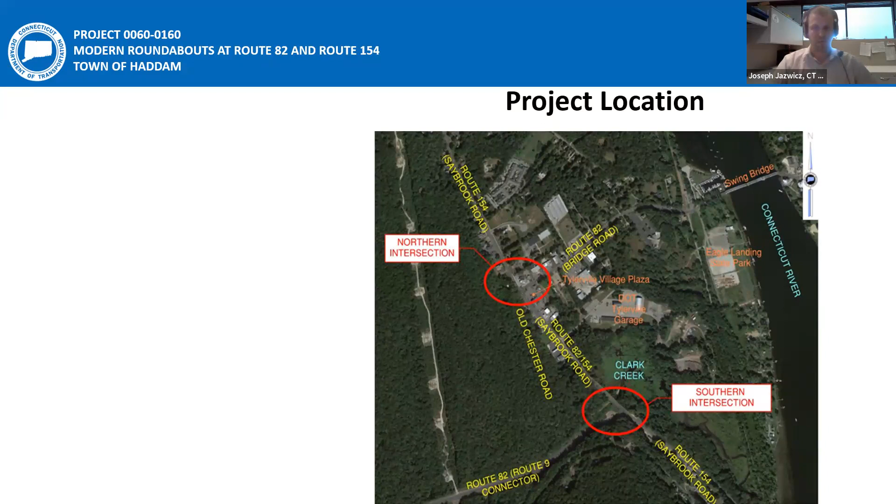This project is located in the town of Haddam, primarily covering two intersections. The first is the northern intersection, where Route 82, Bridge Road, intersects Route 154, Saybrook Road, also near Old Chester Road. It's currently a signalized tee intersection, as well as the southern intersection where Route 154, Saybrook Road meets the Route 82, Route 9 connector.

For those who attended our stakeholder outreach meeting back in May 2021, and our virtual public informational meeting conducted in June 2021, our project purpose might look familiar to you.

We want to increase safety in this corridor by reducing vehicle speeds and the number of vehicle conflict points at the intersections, as well as increase sidewalk connections within the corridor. There are existing sidewalks constructed under other state projects and recent developments, so we want to close those gaps. We also want to improve traffic operations by reducing vehicle queues and delays, and Bridge 622, which we'll discuss in the proposed improvements, needs to be replaced due to its structural condition.

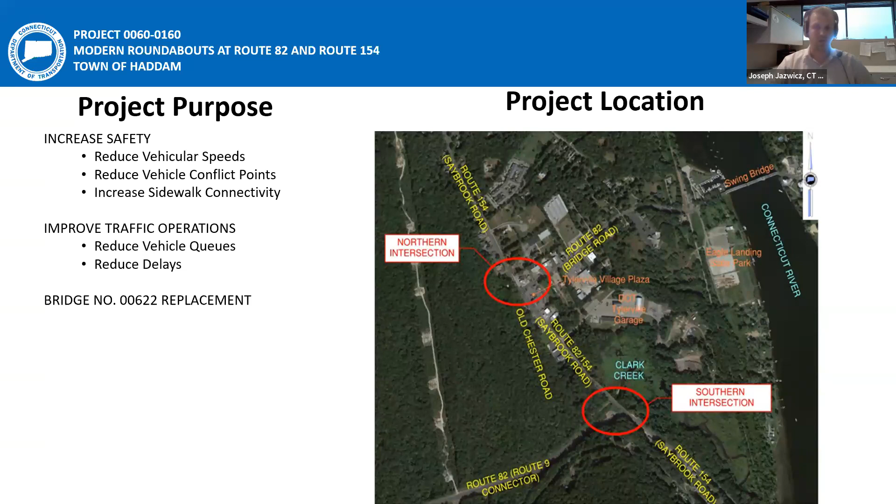A little review of the existing assets: Bridge 622 carries Route 82/154 over Clark Creek. It was constructed back in 1930. Based on the latest bridge inspection report from 2021, with a new report coming out in the coming months, it was rated structurally deficient.

The superstructure and deck both received a rating of 4 out of 9, which is poor condition, as well as the existing signal at Saybrook Road and Bridge Road. It was installed in 1994, currently 29 years old, well beyond its service life, so it needs attention and replacement.

The pavement out there was last resurfaced in 2012-2013 as part of the maintenance VIP program, as well as the sidewalks I talked about earlier. There are many connections and gaps that are omitted, where sidewalks lead to nowhere.

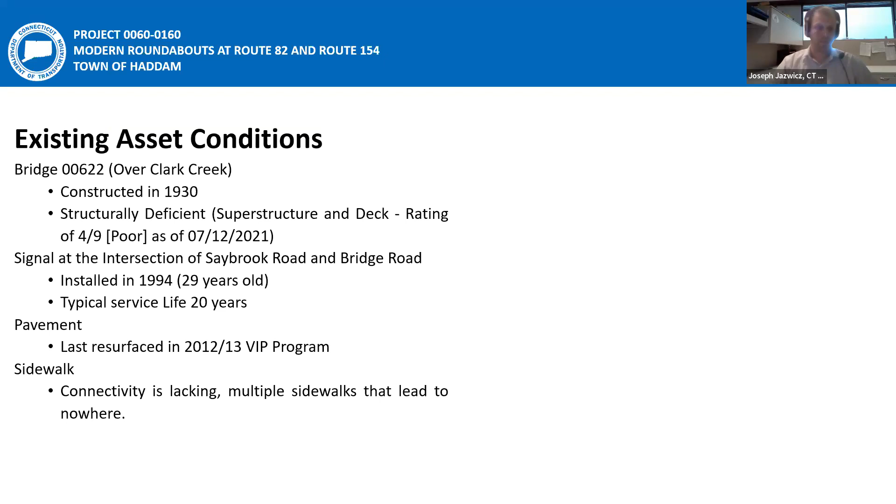Currently, based on our latest public outreach and stakeholder meeting, we've finalized our design. Just this past week we delivered final contract documents to our internal DOT processing unit to get those ready to be advertised. Permit applications were submitted to regulatory agencies back in May, and we're anticipating approval within the coming months, as well as our rights-of-way office is in the final acquisition phases of property that has to be acquired as a result of this project, which should be completed by the end of August.

As for funding, we're currently in 2023 with a partnership with Federal Highway at 80% and 20% state. So there are obviously federal shares at stake in order for this job to proceed forward.

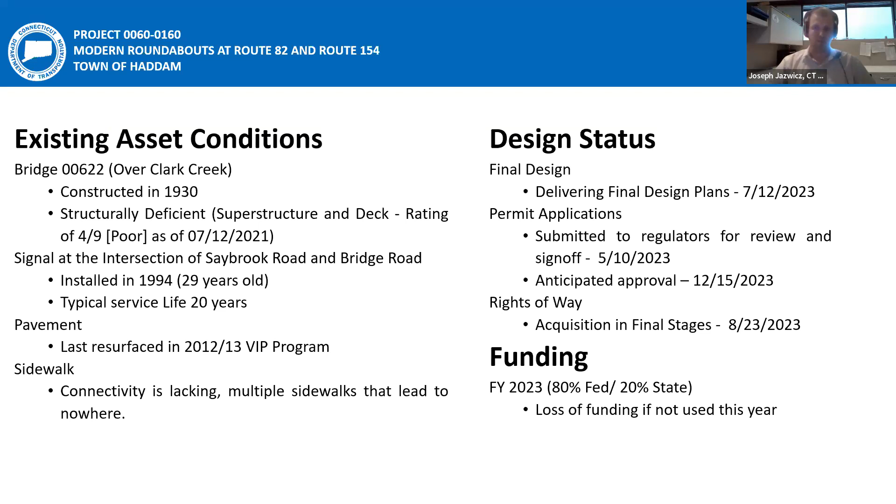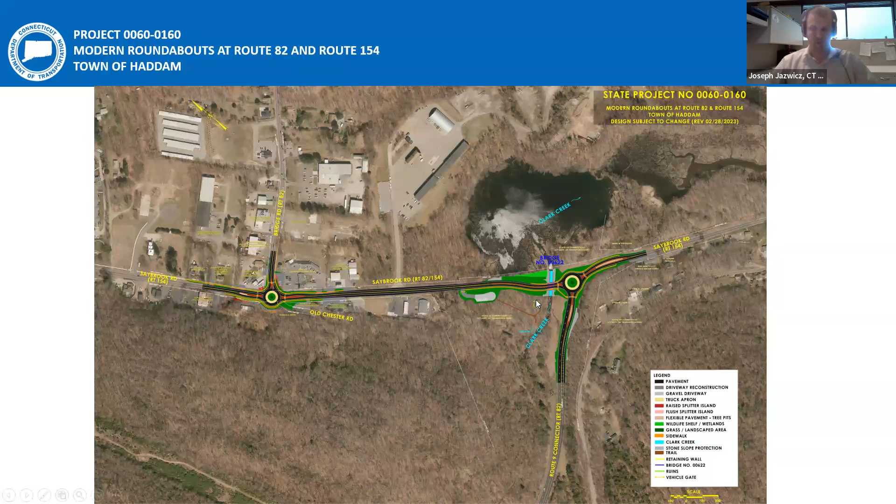I wanted to review the color plan in a bit more detail for those who have not seen this or had the opportunity. This is the overall project color plan. Here's Bridge Road, here's the Route 9 connector. I'm going to zoom into each one and we'll talk about each individually.

At Bridge Road and Saybrook Road, we're proposing to replace the existing signalized intersection with a modern roundabout. It will be a single lane roundabout with splitter islands on all approaches. We have a central island with landscape features and plantings. There's been discussion about including a 'Welcome to Tylerville' sign, and this project will require construction of a retaining wall and closure of Old Chester Road.

Also, driveway aprons will be reconstructed, and sidewalks will provide connection to the existing sidewalks located on Bridge Road, as well as the existing sidewalks currently at the apartment complex at the northern limits of our project.

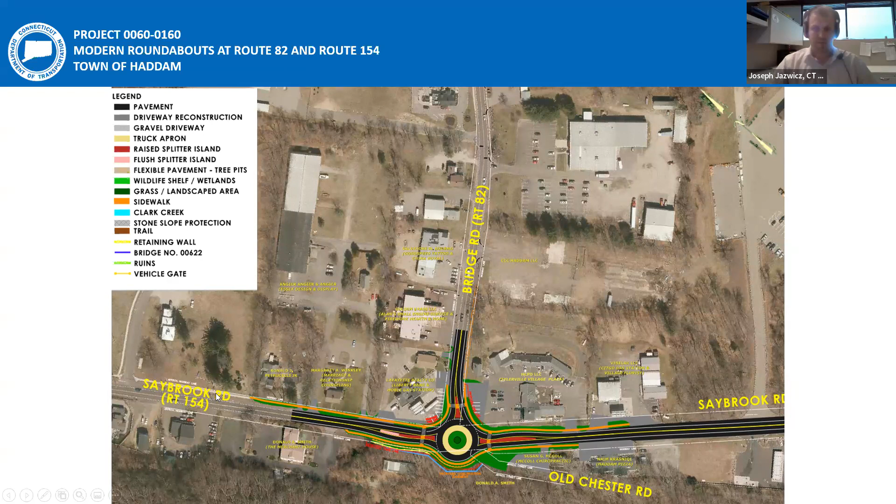Moving to the southern roundabout, the main focus here is constructing a new bridge, 622, upstream of the existing bridge offline. We'll also be providing sidewalk access, splitter islands, landscape treatment in the central island, and truck aprons.

As part of our stakeholder outreach and public informational meeting, the Clark Creek Cascades, we've recognized there's been a draw to the local community. So as part of our outreach, it was suggested to include a parking lot to allow the community to access these cascades and park there, connecting via trail network or the sidewalks. We saw that as an added benefit for the project.

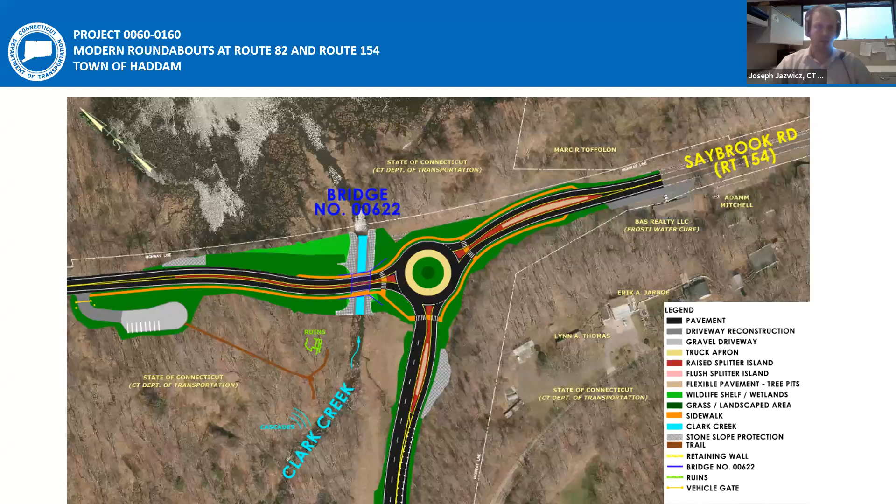In terms of construction coordination, those of you who attended the stakeholder meeting will recognize a lot of this wording, except as the designs progress, we'll have the opportunity to refine it.

Two-way traffic will be maintained during AM and PM peak hours, defined on weekdays from 6 a.m. to 9 a.m. and 3 p.m. to 6 p.m. During weekends, traffic will be maintained at normal operations from 10 a.m. to 6 p.m. Outside of those hours, during off-peak hours, alternating one-way traffic will be utilized, establishing a construction zone with flaggers on either side. No full roadway closures with detours will take place as part of this project.

As much work as possible, when we developed our suggested construction sequence plan and staging, we wanted to do as much work offline as possible, meaning outside the existing roadway. Examples include the proposed bridge and the northern retaining wall. This was for two reasons: to minimize disruption to the traveling public, and to allow the contractor a safer and more productive work zone since he can work offline without maintaining traffic.

Driveway access will be maintained to local businesses and residences during construction. For driveways that are reconstructed, coordination will occur between the contractor and those local businesses and residents, notifying them of when those operations would take place.

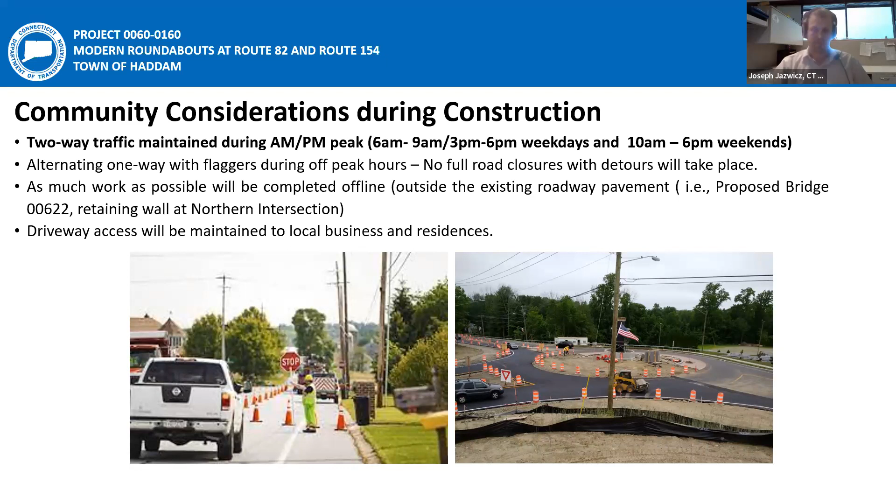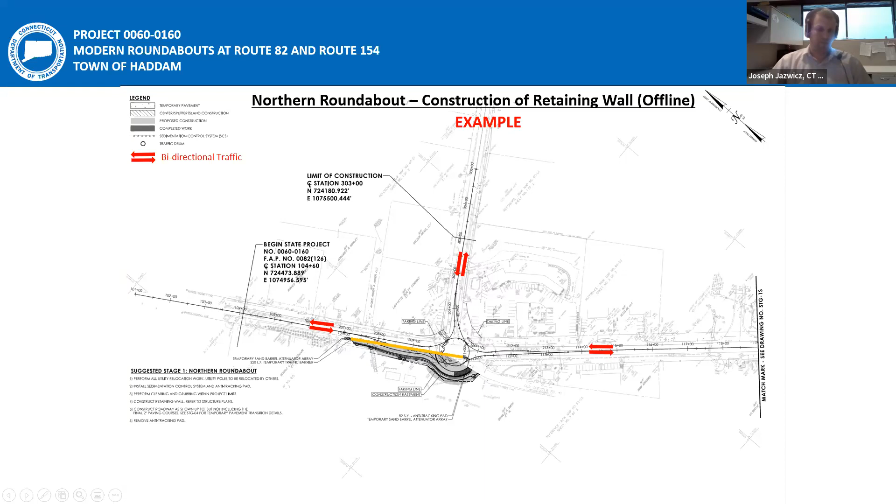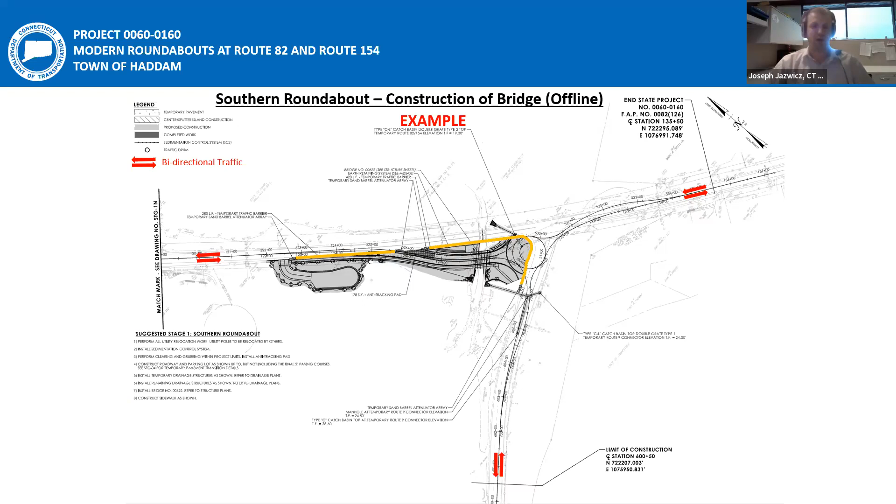Similarly, at the bridge at the southern roundabout, all work is offline upstream of the existing bridge. Traffic would be maintained in the existing roadway footprint while the bridge is being constructed. These two aspects of the job have long durations, so it's a benefit that we're able to perform as much of this work offline while minimizing disruptions.

Here's an example of alternating one-way traffic. The work zone would be established, and on either side there would be flaggers directing traffic. Per our contract provisions, that work zone can only be a maximum of 300 feet in length, and 700 feet in length when only paving operations are occurring, and again those are during off-peak hours.

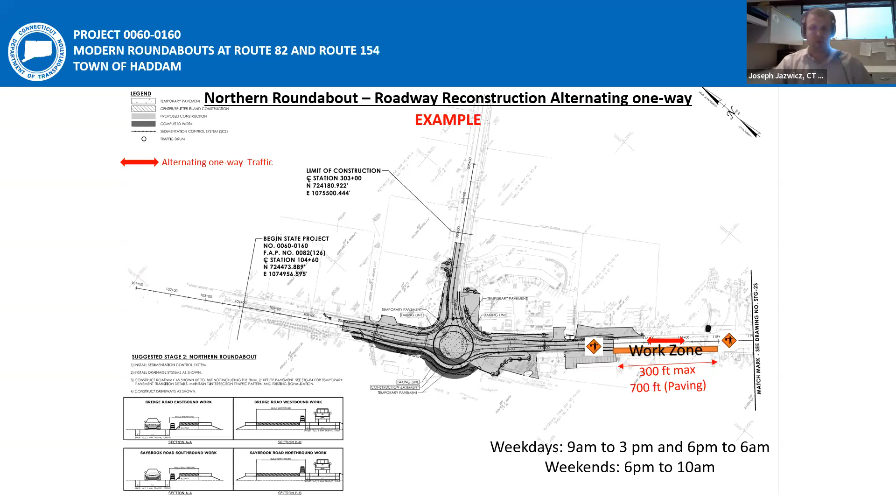Same situation at the southern roundabout when we're rebuilding up this approach.

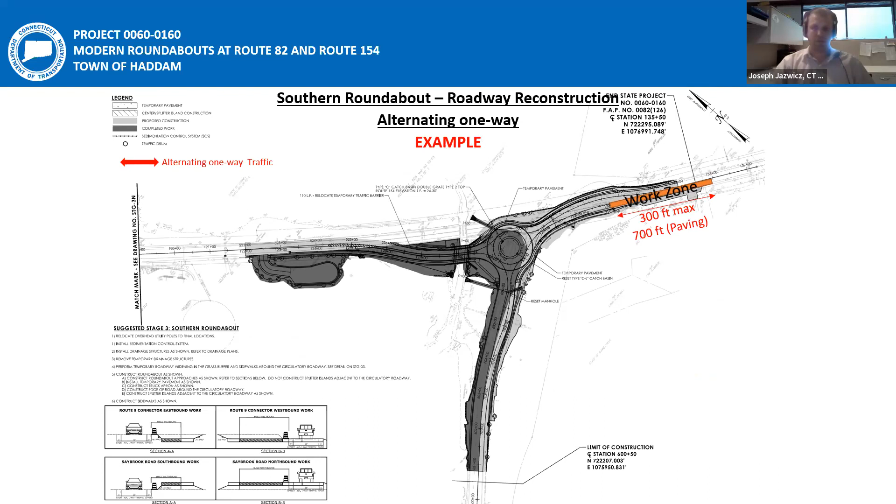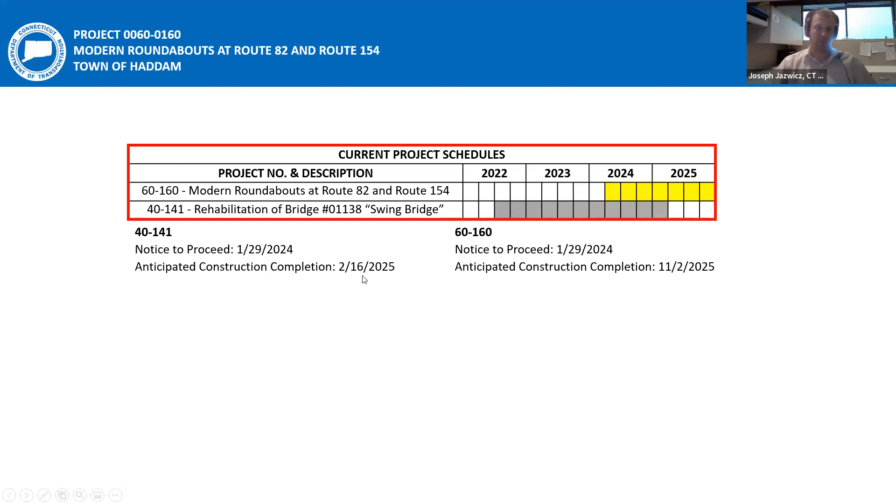As Bob mentioned earlier, we're going to lay out two options regarding construction staging that the department has explored. Currently, this is what we have in our contract for construction activities. Before I walk through it, I wanted to cover why this was the preferred option. The order of activities was selected as the preferred option because it allowed for the most separation between when we're working on various intersections in relation to the swing bridge project, as well as allowing the contractor to disrupt only one intersection at a time while the other maintains normal traffic operation.

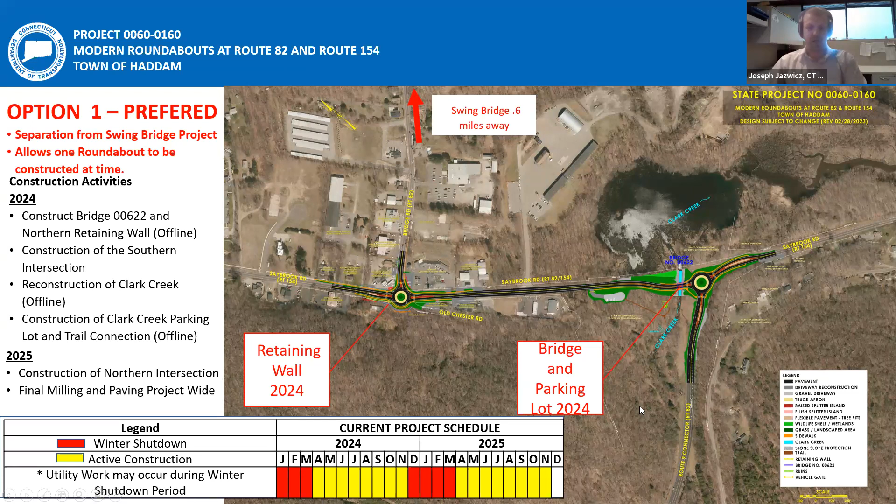So what does that look like? In the 2024 season, the main activities occurring only at the northern roundabout would be construction of the retaining wall, which as previously discussed is all offline work with the existing roadway footprint and traffic maintained, as well as construction of the new bridge and the parking lot. Also in 2024, we'd be constructing the southern roundabout.

The benefit of constructing the southern roundabout first is that due to alternating one-way traffic patterns deployed on the swing bridge, being 0.6 of a mile away, queues could form during some activities. So we want to allow as much of a gap between construction activities as possible, because we don't want overlapping patterns that lead to driver confusion.

Following the 2024-2025 winter shutdown period, the roundabout at the southern intersection would be complete. Then the contractor will move on to the northern roundabout, building up the grades, establishing the circulatory roadway and tying in, and then doing a general mill and fill paving project-wide to connect the two roundabouts together.

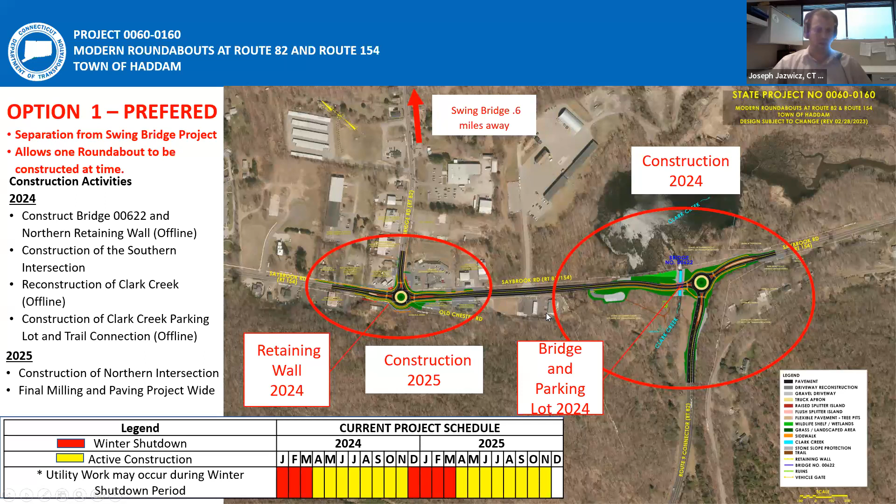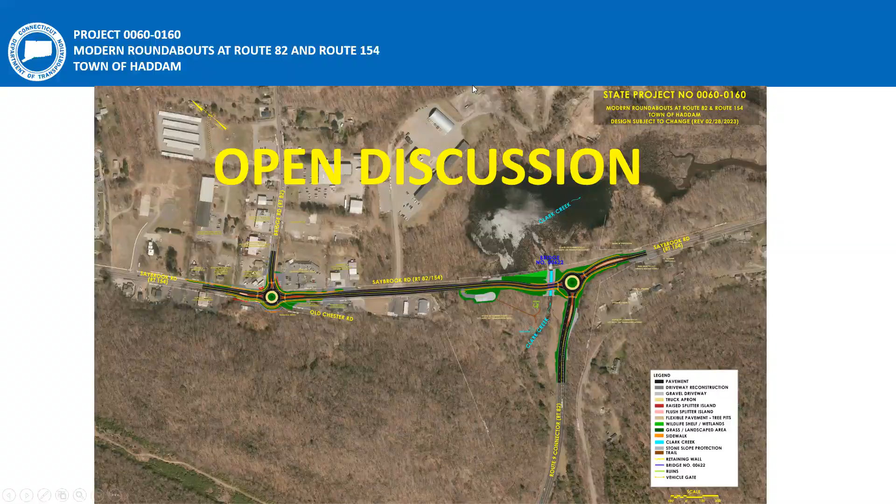I'm not seeing anyone right now. So I see Irene, so we'll recognize Irene. Go ahead, Irene.

Hi everybody, thanks so much. In conversations we've been having about the roundabouts, I wanted to get the plan you shared at the last meeting so I could take a look at it. You guys are probably the best people to answer this question: why is this roundabout only one lane? My thought is that when the bridge is open, traffic stops and builds up. Whether the roundabout is there or not, it's still going to stop. The unfortunate part is that if people are coming down either way, it stops because the bridge is open to boat traffic. So how does this roundabout work when the bridge is open?

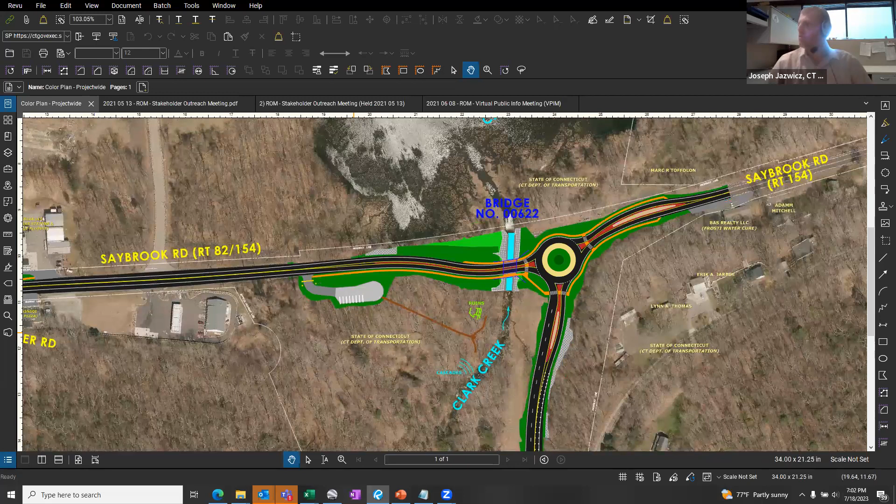They can dismount, walk around the circulatory roadway, and continue on. Basically, the question was asked: the sidewalks end at this parking lot, so why don't they extend and connect to the next roundabout? We had some internal conversations amongst the department and the town, and it was initially decided, due to the additional maintenance, that we would not be closing those gaps as part of this project. There's a wider shoulder out there, but that's the reason why the sidewalk termini are where they're currently at today.

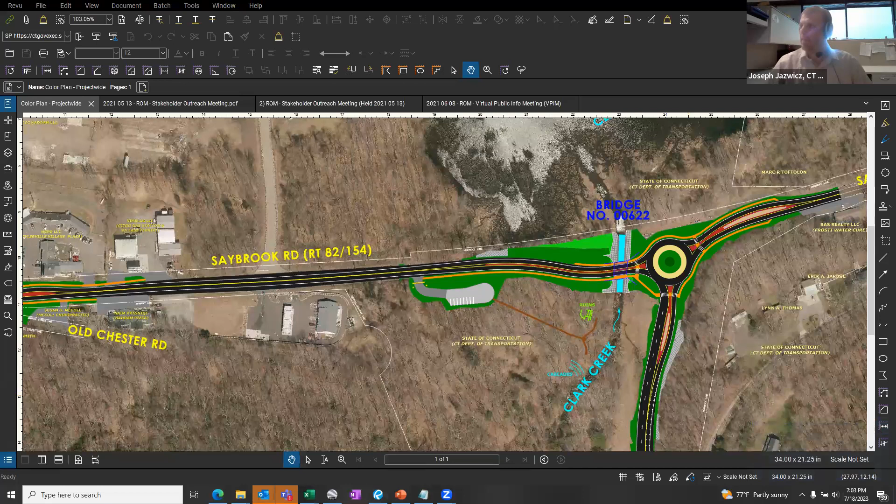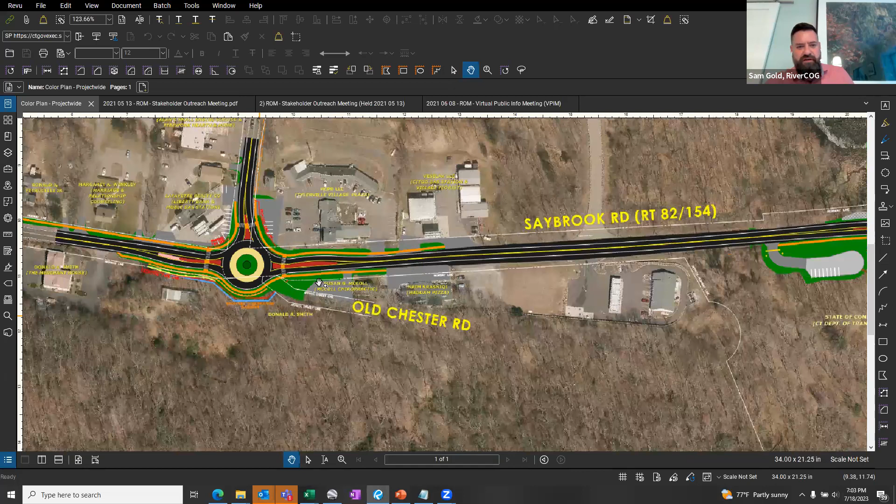So I see a follow-up question from Lauren regarding pulling out into traffic. I know there have been a number of roundabouts installed on other state roads in other parts of the state. Have you seen or heard of cars having trouble pulling out because of the more consistent flow of traffic, as opposed to the pulse of traffic you get with a traffic signal cycle?

I'm not aware of that. As part of our project, we are closing the entrance to the Tylerville Village Plaza here. Typically, you want to have entrances and exits on the downstream side of traffic to allow for mobility in and out of these locations. So you can see we provided additional, or maintained the existing, driveway access here, which is on the downstream side, allowing for additional sight distance.

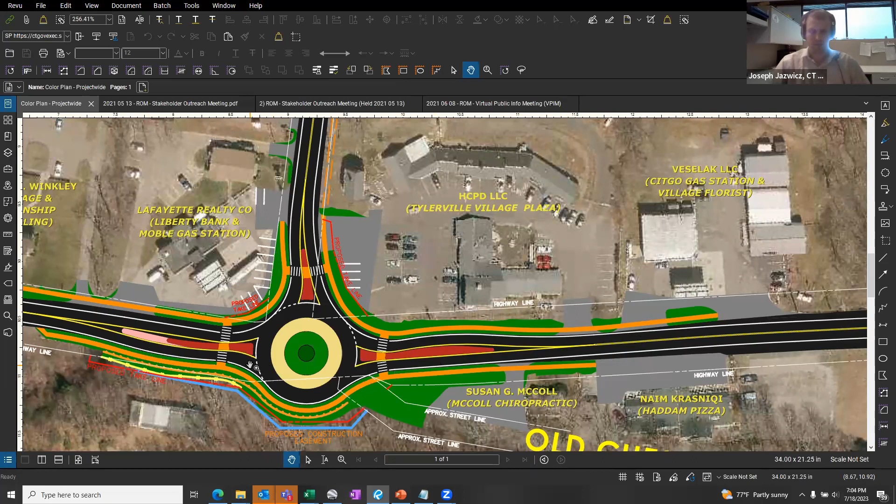But again, vehicles are traveling through here, reducing speeds to that 15 to 25 mile per hour range when entering the circulatory roadway, versus speeds here posted around 45 miles per hour. So there should be a larger time gap for vehicles to exit.

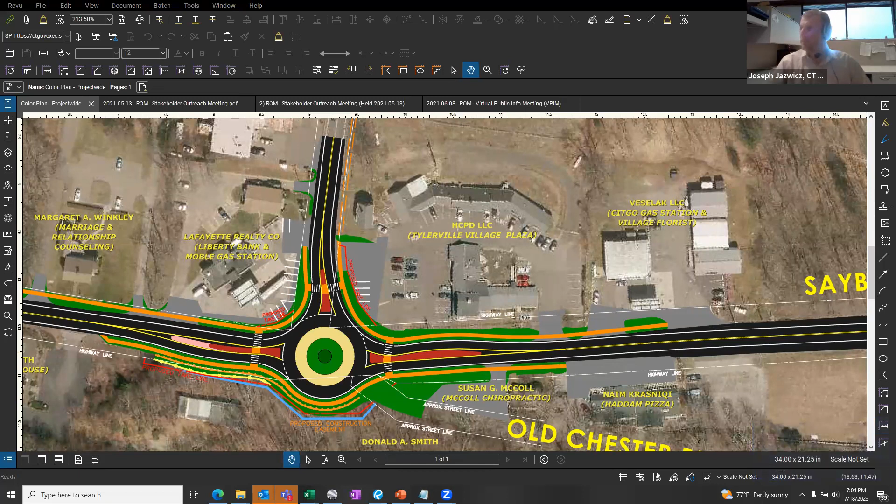I see another question in the chat, which is: has state funding for this project been committed?

The answer to that is there was additional funding required due to increase in utility costs, as well as our design has progressed, which caused, as discussed earlier in the meeting, additional funding to be signed off by the local council of governments. But state funds are available for this project and committed.

And then a follow-up from Kate: are there any factors that could delay the project schedule that was presented tonight?

As outlined earlier, we delivered our project contract development. We still have outstanding permits that need to be signed off by the regulatory agencies, but we're anticipating that within the coming months. At this time, I'm not aware of any other things that would cause a delay.

And then Lauren had a follow-up in the chat with suggestions about the difficulties of making turns out of driveways currently at a couple of locations.

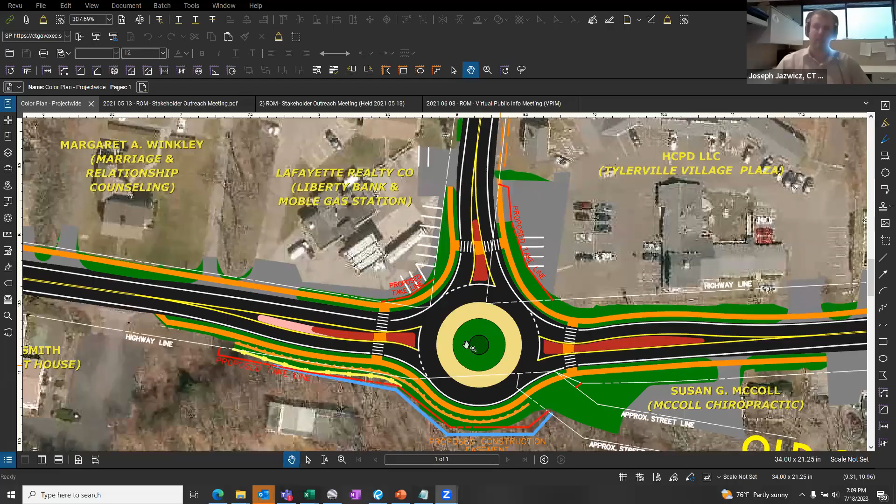So this would be a mountable area that vehicles could use if there was a crash, allowing them to get around that location. Thank you.

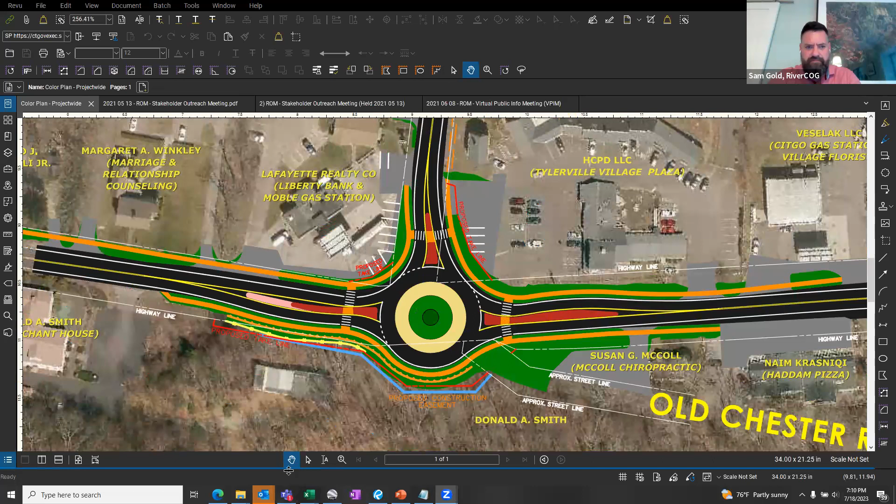And I see another question in the chat: is DOT aware of plans for the proposed Heritage Trail, a three-town multi-use pedestrian and bike path which includes East Haddam, Haddam, and Chester, and this trail will pass through the roundabouts?

I am not aware of that. I don't know what division or office that's coming through, but that is something we can definitely follow up on. It sounds like we're a lot farther along on our design than they are.

And Sam, there's a question in the chat about extra funding that was mentioned that's coming from the COG. Yes, I can address that. So...

This meeting was facilitated by our first selectman who sits on the COG board. River COG has a role for approving the spending of federal funds. The vast majority of the funding for this project has already been approved, but this was a cost increase that came to the COG board for approval. And the first selectman voted to table the item until there could be this meeting and a discussion with DOT about the project and about ways that this project could be facilitated to minimize the impacts.